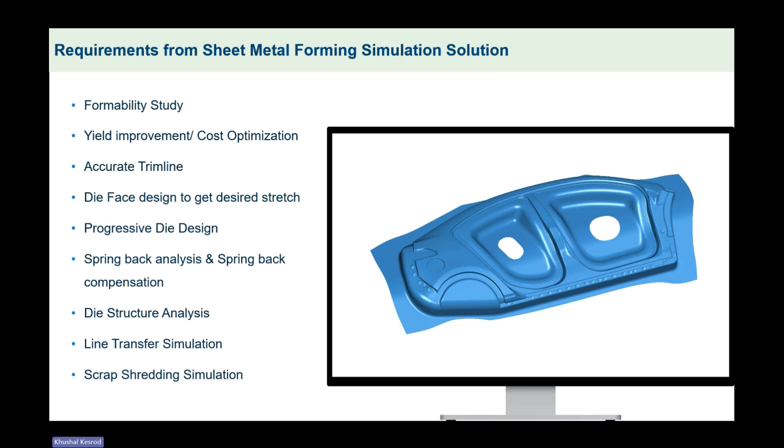So that is where die structure analysis comes in, line transfer simulation, scrap shredding. Some of these topics I have kept for future reference, because in one go we'll not be in a position to cover all of them.

So we have different modules in Dynaform. One is blank size engineering, under which you are able to simply do unfolding. But unlike what you do in CAD, which basically unfolds just the same area as your part, here the stretching and all those factors are also considered even at this particular stage.

So unfold sheet metal geometry, quick formability, you can use it for nesting, whether it's multiple outline or a single outline, multiple part and single part, or even assembly level nesting also can be done, and you can as well do cost estimation. Pretty much quick in doing that.

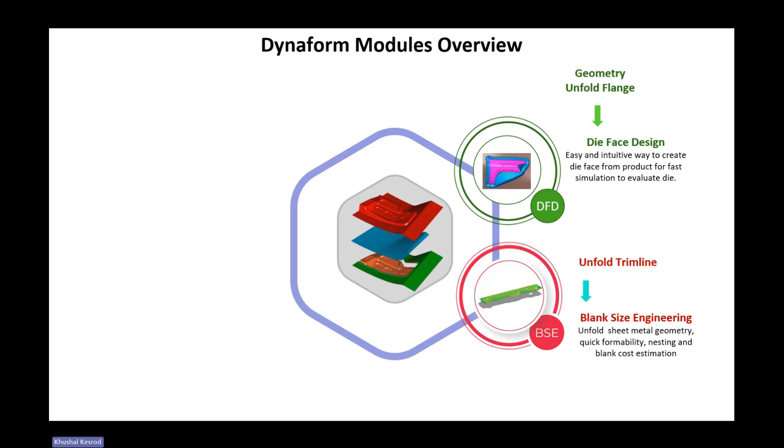Then comes die face design. After you have your part, you should be in a position to properly define the addendum before you reach the die face, and your die face should also help you bring a properly formed component. In addition, you will be in a position to define beads in the die face design area so that you get appropriate stretch.

Formability simulation, where deep drawing, line die, progressive die, spring back and spring back compensation, draw bead optimization, all these you will be in a position to do at this stage. That is what formability simulation is.

While it uses our own internal solver called SIGFORM, it can as well use LSDyna as an external solver. So Dynaform, being a very nice user friendly pre and post processing environment, makes use of both solvers, SIGFORM and LSDyna.

Blank trimline development is another module in which you can optimize your trimline with multiple iterations, so that you don't have to rework your model after final draw.

And there is a module for tube bending and forming. It's a hexa corner, one of the corners was very important, which is DSI, die structure integrity, which is not shown here. Tube bending and forming again uses LSDyna as a solver, only LSDyna as a solver, I would say.

With this, we can actually touch on a basic and very important module called blank size engineering. As I said earlier, it helps you unfold the geometry, do an early check of formability, and material cost estimation by carrying out a nesting operation.

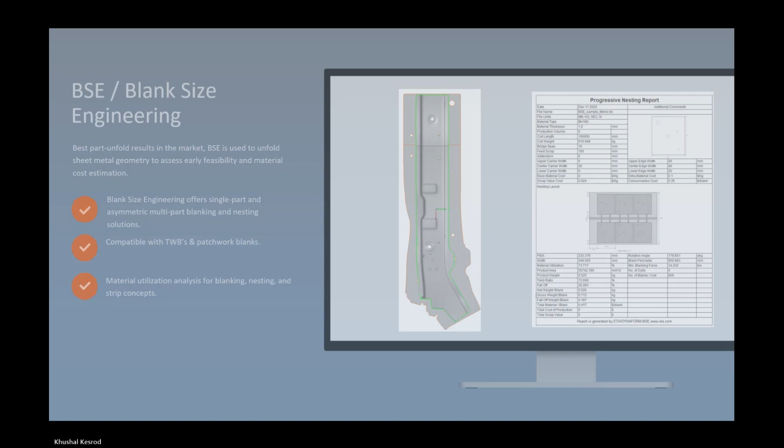So I'll directly take you to the software and show you an example so that you understand it better. When we open Dynaform, this is how it looks like. It's pretty simple. The project that we basically see is to manage complete data in a single directory. Then you have processes like BSE, DFD, FS. You can import the geometry.

Let me just create a new project quickly. DF 9000, some numbers. You can mention a directory in which everything will fall, in the single directory under the same name of the project we have given. And there are different applications that Dynaform basically does. So we are selecting blank size engineering and going ahead.

Under blank size engineering, you are able to do outline formabilities, nesting multiple outlines, unfold, assembly, and so on. But we're going ahead with a few basic things. Here, some of the icons which are not used at this stage are automatically disabled so the user doesn't get confused.

Geometry is something we need to import to start with. Then we have all the views - how do you want to see geometry, shaded or wireframe, meshing shaded or wireframe, and standard views like top view, front view, rotate, all sorts of things. Then some common utilities like angle measurement, length measurement, and finally the result, which is currently disabled.

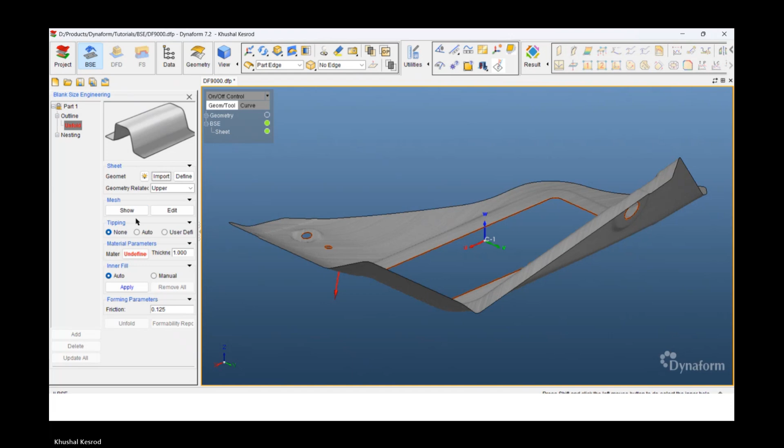Here, when it is doing unfolding, it anyway needs mesh, so please keep this in mind - it's unlike CAD tools. So you can refine meshing if you want at this stage. Tipping automatically takes place if you choose auto. Forming needs really appropriate tipping, but here it's okay even if you're not mentioning that.

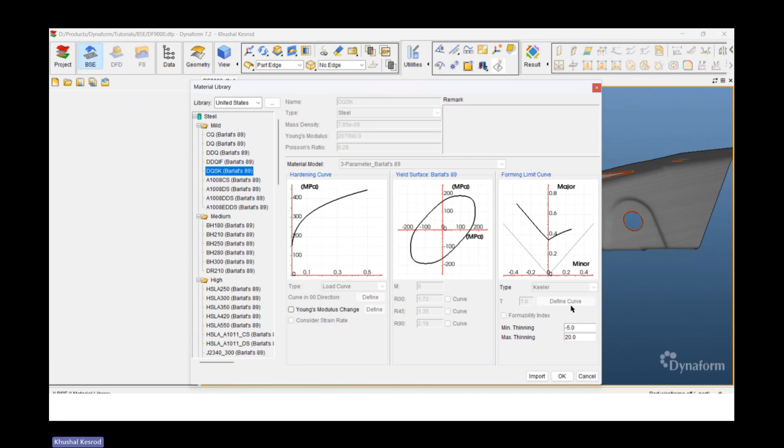Then there is a material library which you can access. If I click on material library, you have US material, Europe standard material, China, Japan, and you can define user defined material library as well. I'm selecting one of these, which provides hardening curve, yield surface - how within the surface the sheet gets stretched - and finally the forming limit curve. Okay, I've chosen that, and I can say unfold.

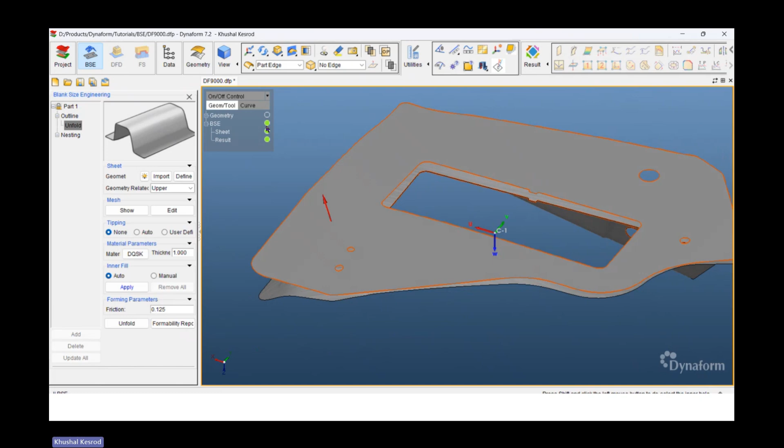You can see the unfolded component and a final component also. I'll switch off the final one so that you are able to see only the unfolded one. At this stage, I will also be able to see the formability report.

Let me quickly show you the different options you will see under formability. You can see thickness variation, thinning in percentage, minimum major principal strain, FLD, and so on. You can choose what format you want and apply so that you get a quick report.

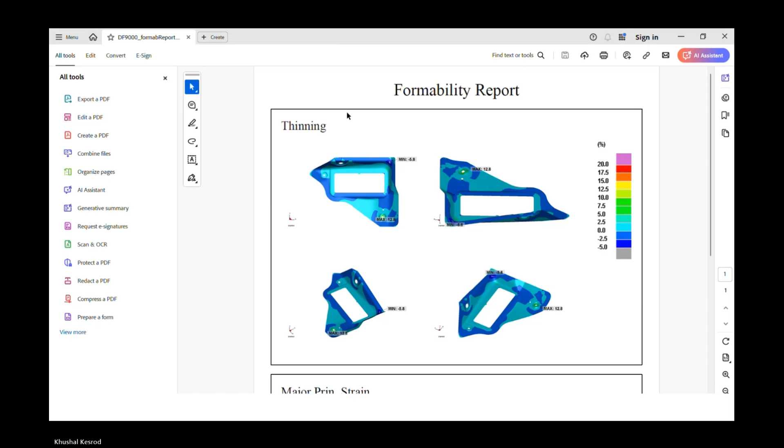So for formability, you can see how percentage thinning is shown here in a different orientation. Most likely it remains in the range of below 5% only. You can also see major principal strain and so on. We have only chosen two parts - otherwise it would have been a little more detailed report.

Let me show you next, which is nesting - most important. So for whatever blank we see here, if it has to be taken out of the coil, you can create the nesting that you want. There are different types of orientation available in series. Parameters for coil can also be mentioned, like what is the width.

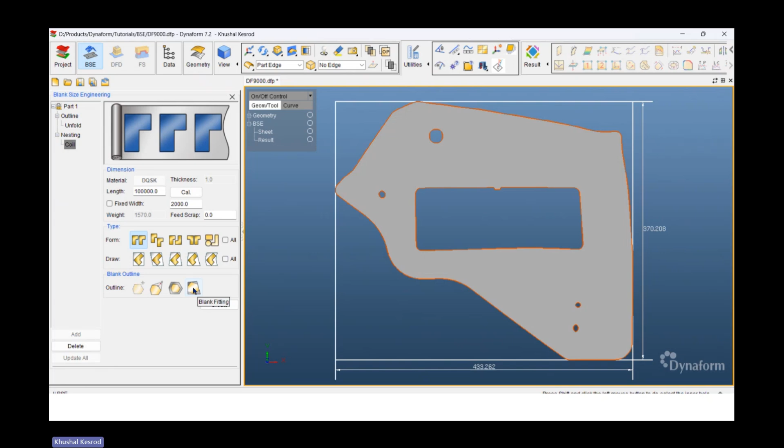You can do it in pairing, you can do it in mirror, even based on draw you will be able to take the size. And for blank fitting, you have different options - automatically it chooses a particular orientation. You can see what the area utilization is in terms of weight - complete detail it shows you.

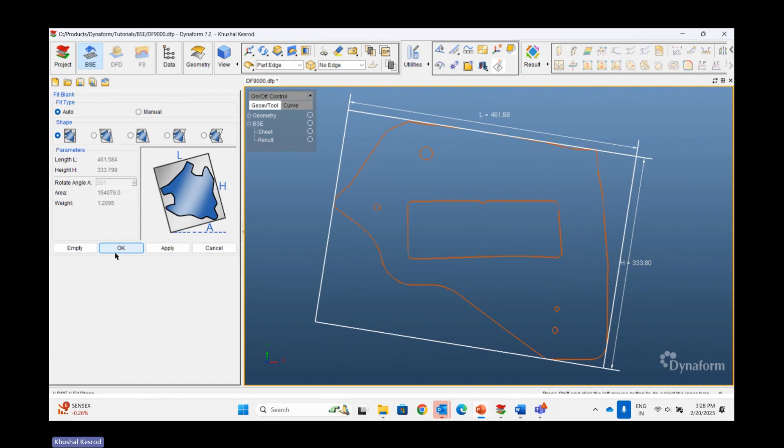But in case you want to make any changes manually, you will be able to change its rotation orientation. It shows you real-time weight change and area change. So automatic fitting pretty much gives optimum results. You can say that fitting is okay for me, and let's create the nesting.

Even before creating, between both the blanks you can set what distances you want to keep - bridge span - and if I'm cutting with a laser cut, 2 mm is more than sufficient so I'm able to utilize better material. It shows the highest utilization is 55.304 with multiple iterations. You can choose which iteration to go ahead with, and see each iteration by clicking on it to see how the orientations happen.

Now, on top of that, there are some functionalities at the bottom - you can further click and adjust things manually within this particular iteration, such as rotations and translation. It could be too much, but you will be able to make some changes here as well.

Okay, so I don't want to make any changes manually - I simply want to cancel that and generate the report.

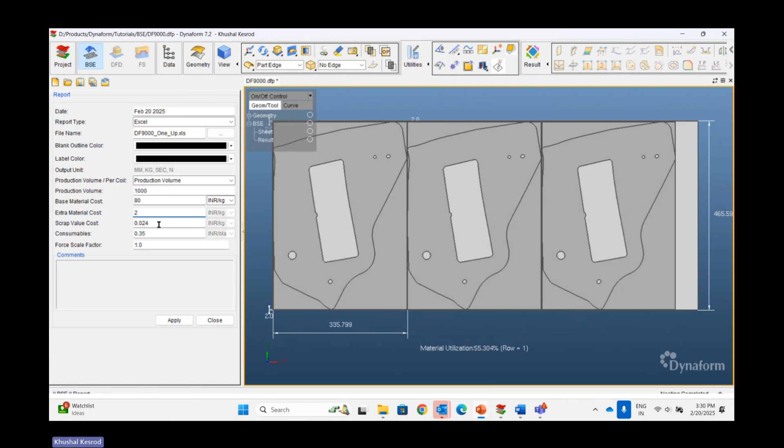Now when we click on report, you choose what type of report you want, whether it's Excel or something, and then you mention production volume. Here the rate INR per kg, let me mention - I'm not sure if it's correct, but 80 rupees is what I'm mentioning. Material handling cost is 2 rupees per kg, and consumable is 1 rupee. I'm just applying that.

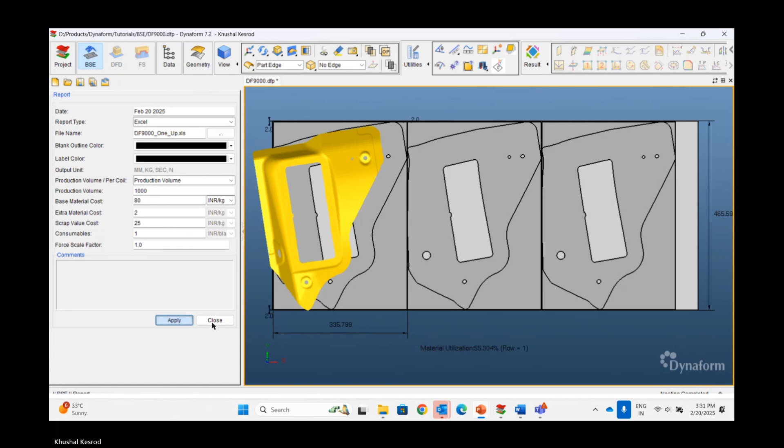Okay, so it is generating a report in Excel format, which is what we have chosen. It will show me what cost it will take to make 1,000 components, because we are giving production volume as 1,000. Coil length was anyway considered earlier.

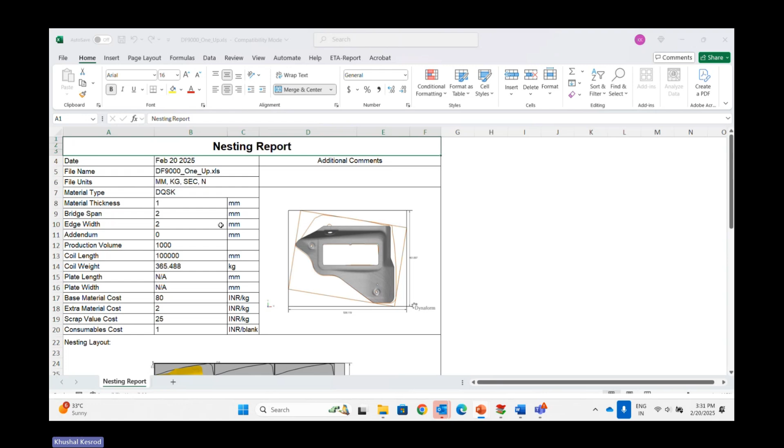It provides me the date on which the report is generated, what was the file name, units that were used, material type that was chosen, thickness of the material, bridge gap, and all those. It gives me all the inputs first.

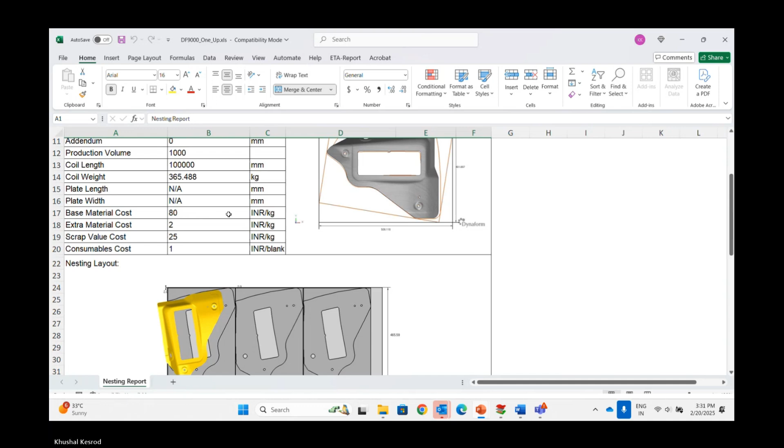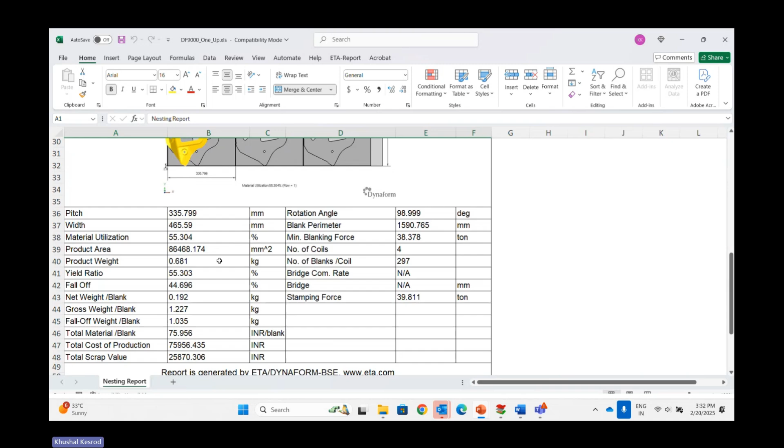After the nesting layout below, you see these are the cost inputs we have given, and below you see what is the pitch distance between both the blanks, the total width required, the percentage material utilization, product area, and even what scrap volume you're going to get - value, not only volume, because we've already given rate for the scrap as 25 rupees. So total scrap value is this much. Nice detailed report given. So let us come back again.

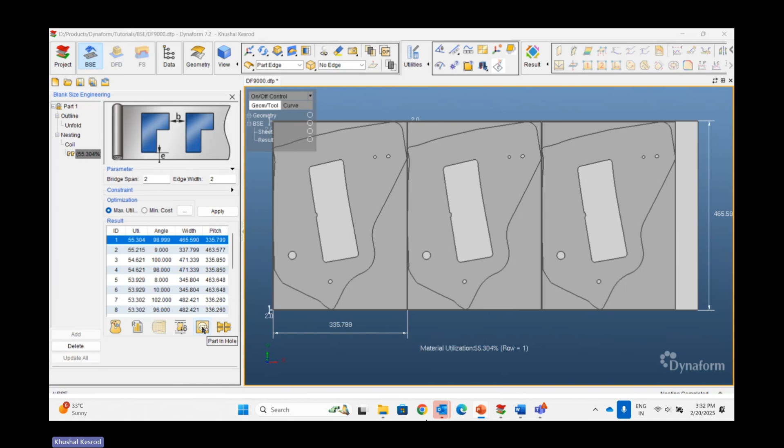Now this particular opening, if it is large enough, we are able to accommodate some small component in it. So a small component's blank can also be taken into it - there's something called part in the hole. So that cutout is otherwise going to waste. So before we do that cutout, I want to basically take out some small blank out of that.

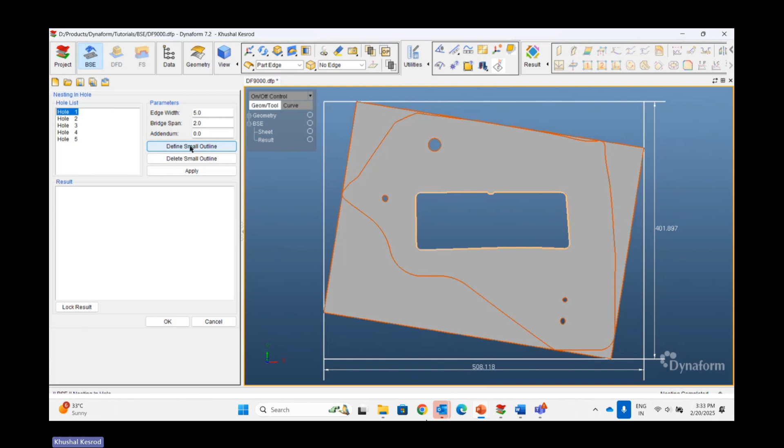Okay, so define a small outline - you can define it here, or you can import that. All these are the small and big holes. But these bigger holes are where I want to utilize by putting some small blank. So I'm simply creating it manually, not importing any geometry.

I'm just creating that rectangular - you can create, let's say, two different rectangles, small, so that you're able to take, or maybe a single large one. I'm just, for example, defining one small rectangle and say okay, apply, okay. Now in the nesting, you are able to see some small blanks are actually taken out.

You can see the dark borders inside, and now the utilization it shows is 60%. Before it was showing 55%, right?

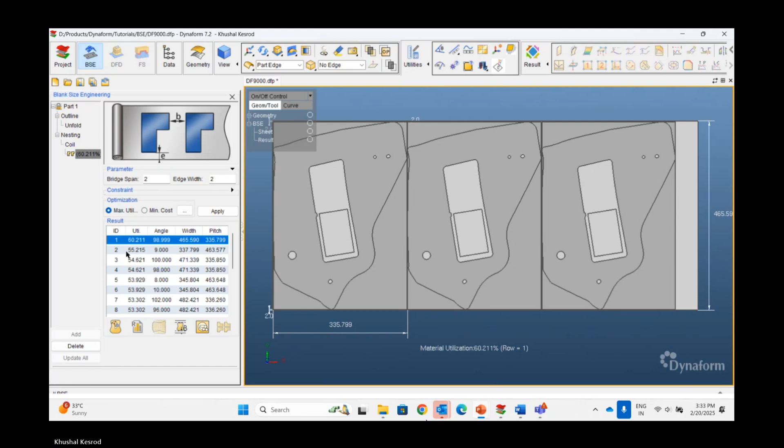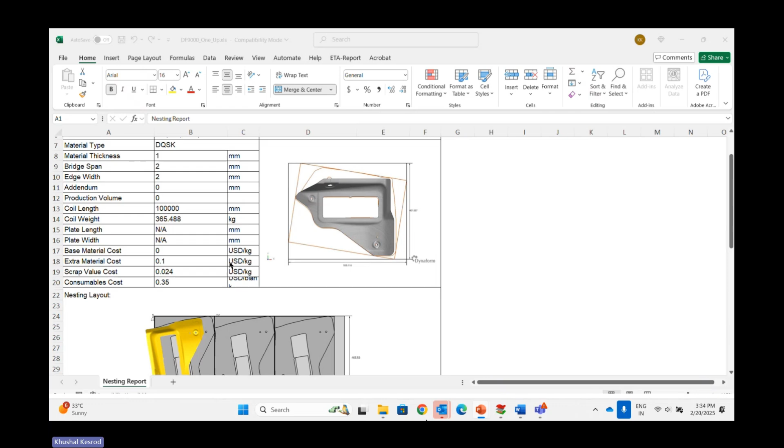And if you extract the report, obviously most of the things will remain the same. We're not making any changes here in terms of USD and all those, because of time constraints. So it's simply going to continue and taking that. So here we will only focus on what is the percentage utilization improved - from 55 to 60% is what it is showing us.

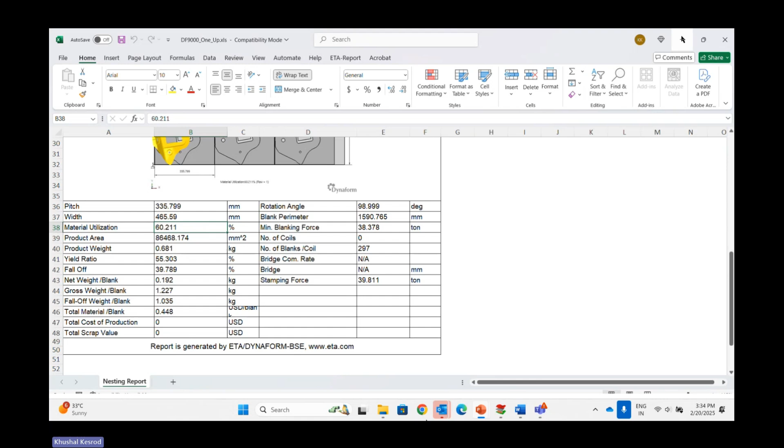Okay, so let me take you to a little more advanced example. Within the BSE, instead of importing the simple one, we're going into part and seeing the advanced option. Under advanced options, we have something called tailor welded blank. So blank - in fact the name itself shows there could be two different materials. There could be change in thickness, change in material, and so on. It's basically a tailor welded blank.

Okay, so we're going to choose - let me select the surfaces which are falling in blank one, including that, and under blank two, I want to select the remaining surfaces. All right, so let me select. There are many good selection methods here.

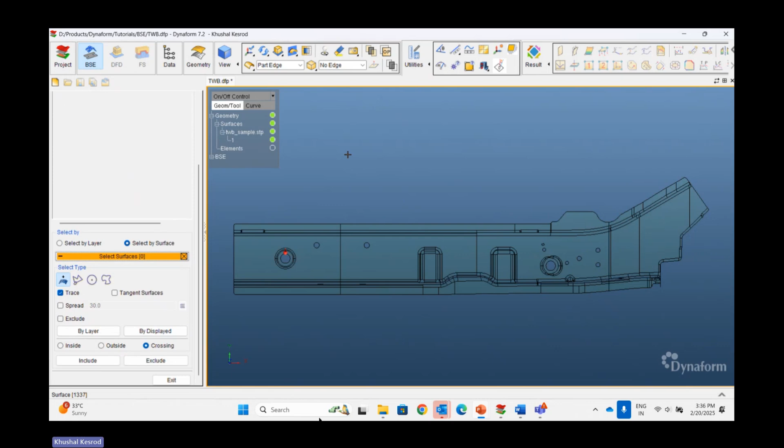It's very user friendly. Eventually one can learn to handle it in a better way. So yeah, both the blanks you can actually define.

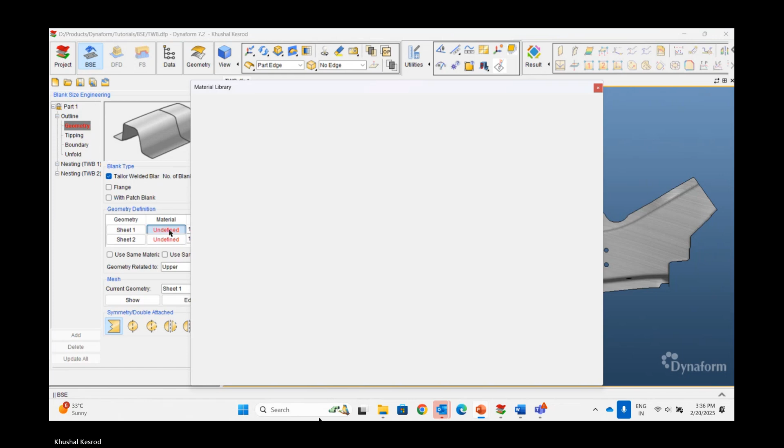Let me define different thicknesses - 1.2, sorry, it's 1.2, then 1.3. Let me choose material, and another material here maybe. So there may be different material, different thickness, or same material with different thickness, or something like that.

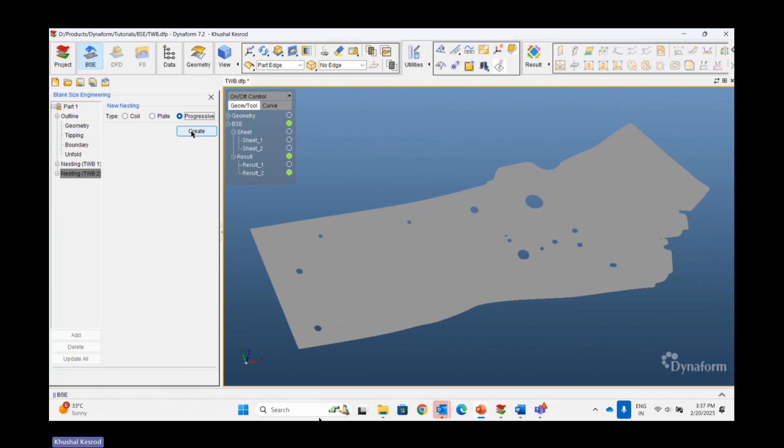Okay, so now you can see under nesting, you can - anyway we can do unfolding first - but under nesting you see tailor weld blank one, blank two. So there are two blanks. This is the first blank and second blank. So let's do a nesting under progressive for the second one only, which is a little more complex compared to the first one. So this is how it will basically show you.

And let me just select another option, mirror nesting. This time the rest - blank outline and all those - will keep the same.

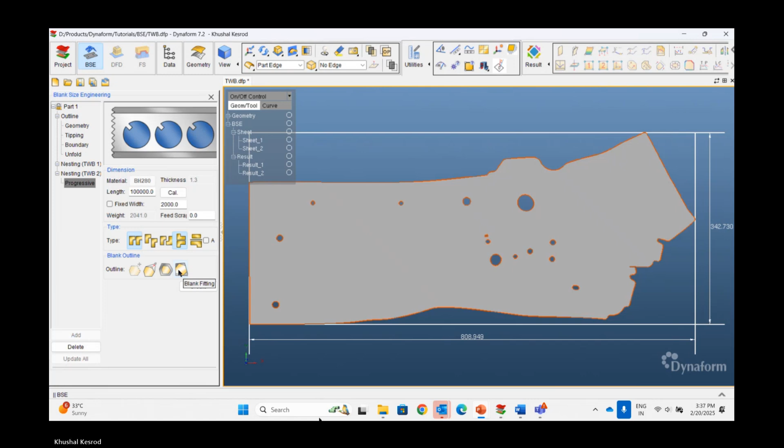Yeah, I'm just keeping it as it is. Then carrier distribution, I want to keep that as a center. And when I'm selecting that, you can see in above figure B, D, E, all those I am actually making 10 mm only. Sorry, B I think is between two. Let me just increase that so that there is a sufficient gap between mirror blanks that we use.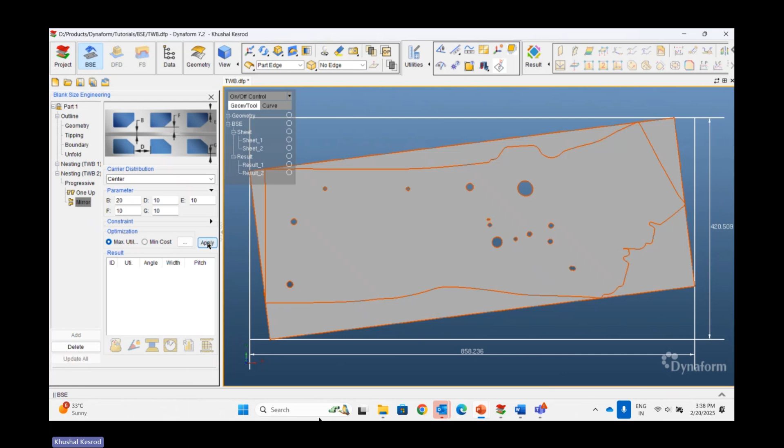And optimization can be done based on maximum utilization or minimum cost. Ultimately, both the same. Here, it could be little different also because it is tailor made, having different material, different thicknesses. So you can mention those cost of the coils and all those. I'm just saying apply. You are able to see the utilization here, 68 point some percentage in the topmost.

Again, same thing. We have already seen manual translation or orientation change. Yeah, I think I can skip this. We have already seen that.

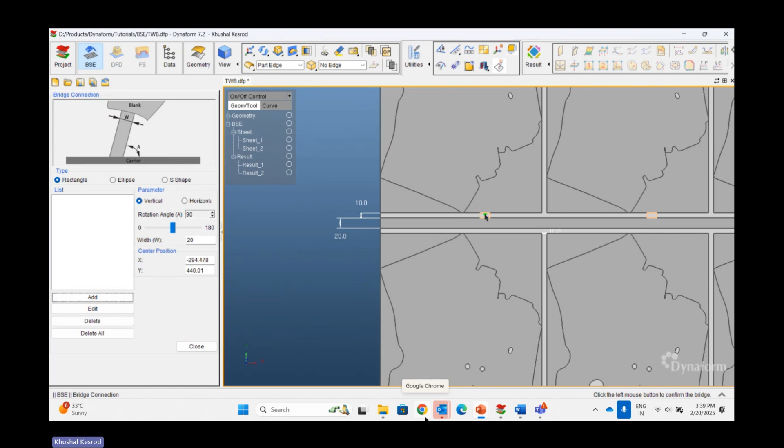And then bridging. When we are actually having mirror type of blanks, if you basically want to carry them together in progressive, you can connect them. That is what is called bridging. So rectangular type of bridging, I want to place somewhere between this, and only one side you are creating bridge, automatically second side it is taking because you have already used mirror.

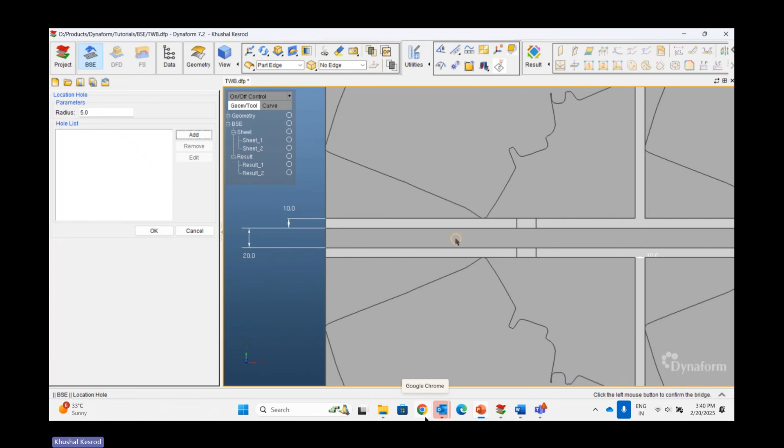Again, there is another functionality, to insert the hole somewhere, so that for positioning, you may probably use this location hole. So I'm just mentioning 5 radius hole to be placed in this area. This area anyways is going to go in scrap, but in progressive die you will be in a position to place your blanks properly. Okay.

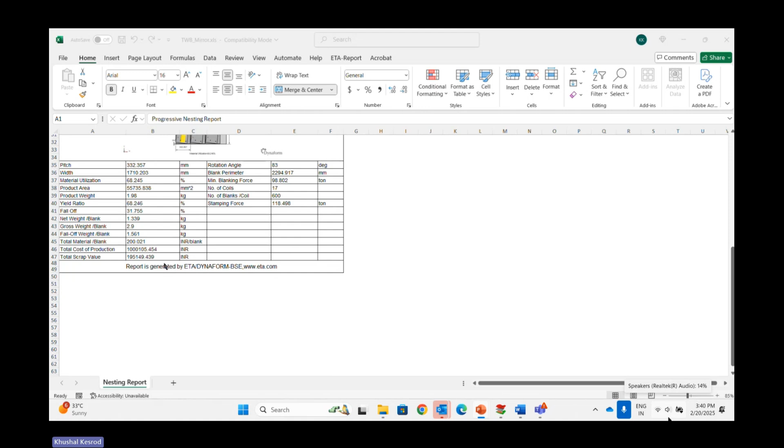So this is how detailed, all functionality it has, and then you can generate report. Obviously before generating the report, you can mention what are the rates, so that it gives you complete estimation. Here it shows you all inputs that you have given, what was the production volume, what is the rate that you have given, and finally, related to blank.

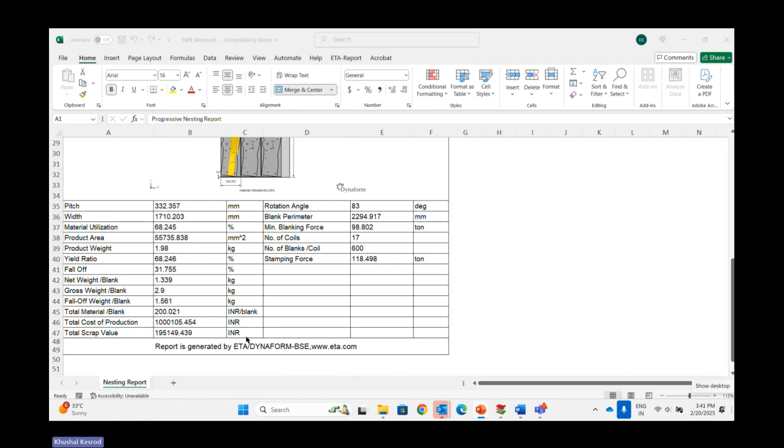So, the single blank is basically costing you 200 rupees, and total cost of production is around 10 lakh. Scrap is around 1,95,000. So that's how it is. Okay, so in fact, one more option here we have is assembly nesting. So you can have 10 or 20 sheet metal components in a single assembly, and it can actually help you estimating cost for all the components.

Another module that we're going to see is die face design. This is mainly conventionally done in software, but as I said, it is basically done by experience of the designer and intuition. But advantage of creating addendum and die face here is you will be in a position to check them quickly over here itself. You can as well add beads, their parameters quickly, and even the capacity and all this.

Okay. So quick and easy die face design enables more accurate, more robust estimation process, and it increases process reliability, efficiency, and cost reduction. So die face preparation is one of the things this module is used for. Binder creation, beyond the die face, the flatter areas, and addendum creation. Addendum is basically between binder and a part.

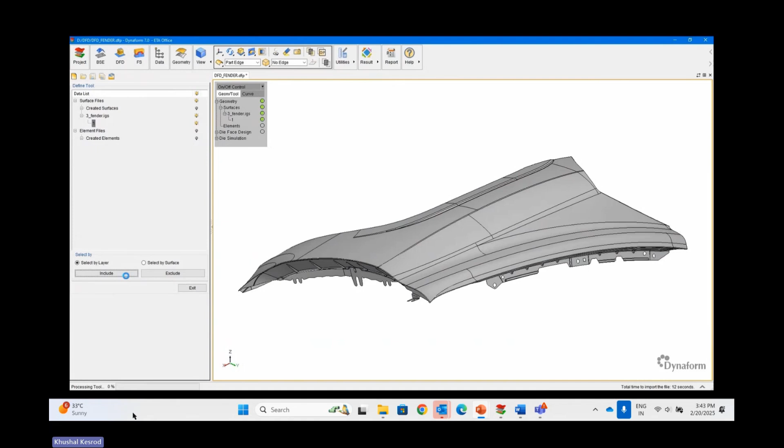DFD is the name of the project we'll create. Fender is the part for which we are basically going to define die face. So this is the part for which we are going to design die face. And here there are going to be two operations.

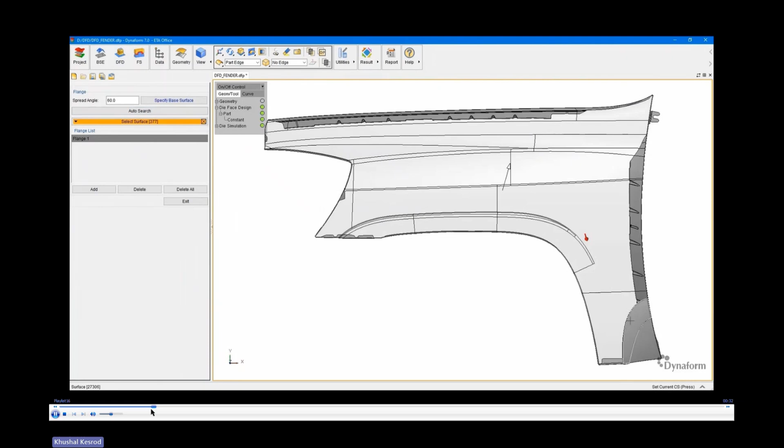There'll be flanging also. So firstly, we have to define the material that it uses, and then here it's a flanging. So you're just choosing surfaces which are pretty much flat, and then adjacent to that, it automatically selects the flange area, and you can see how it can differentiate that.

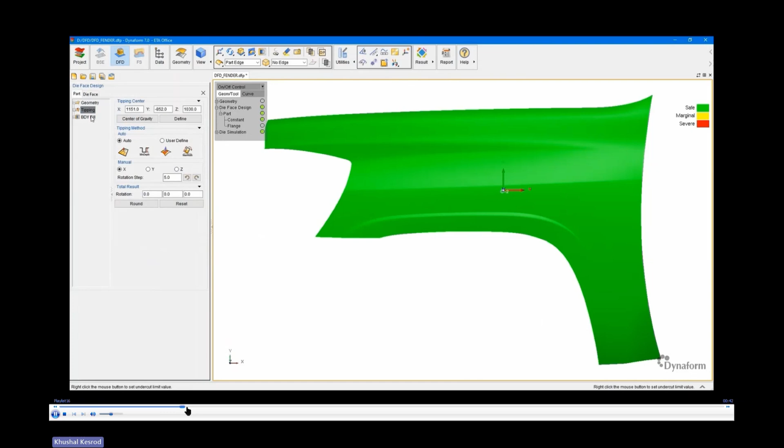Smart enough to understand. Then tipping obviously makes a difference to how its addendum and orientation is going to come, but we can directly go to body fill. There is an automatic way of filling it so that major areas where undercuts are can be filled.

It automatically extracts the boundary around, and it uses curves based on the options that you give. 300 is the radius that you have given. But some places, if it is not acceptable, you can even do it manually by right clicking that. And I'm just creating a manual curve in this zone particularly.

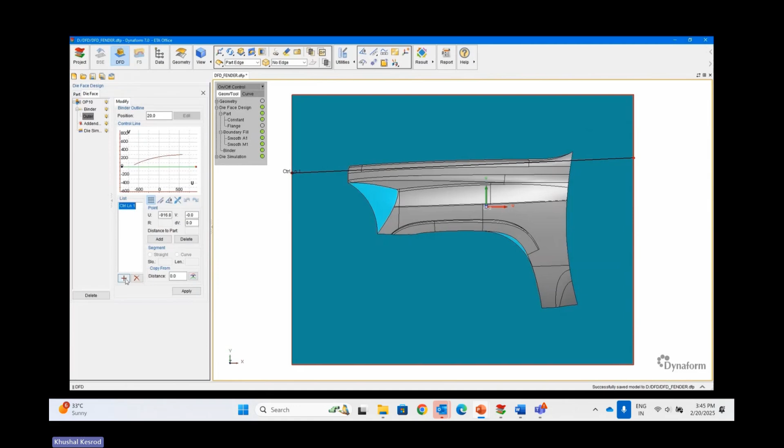Yeah, and this is the binder area, just taken larger than it requires, and these are all control curves that we need to define along and across the length and breadth of the component. This is just to ensure that we're giving different control to different segments. So our ultimate aim is to smoothly define, above the tipping plane and below the tipping plane zone, how the curves should be.

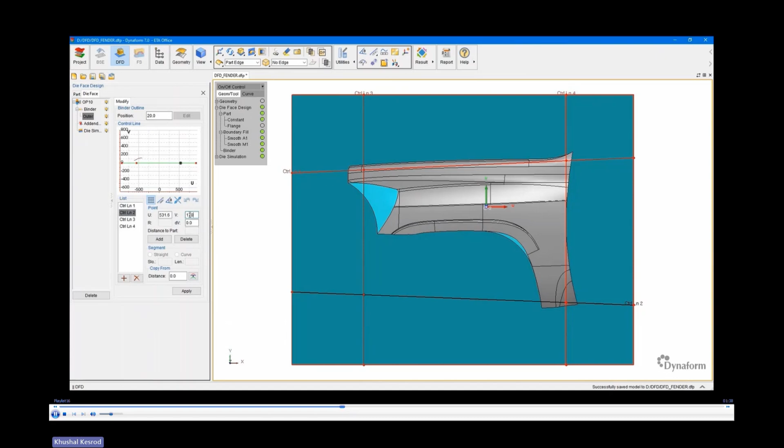So we are actually trying to make curves very smooth, and you can see there are curves 1, 2, 3, 4 that we have actually defined, and we are simply tweaking their roundness and transition, I would say. So that is most important. So once that is defined, you're able to mention its actual location where it has to be, so that it makes it smooth. And once it is done, you can accept that.

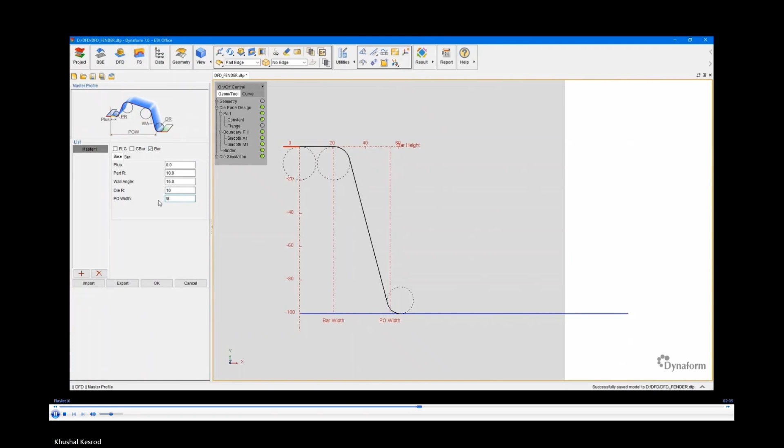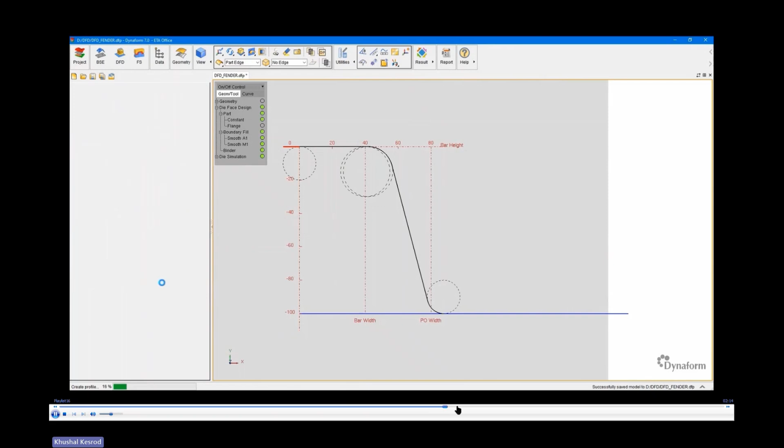Now, this is addendum design, where you are actually giving different dimensions so that material flows properly, right? So you are essentially defining the bar and the radius of the bar and so on at different locations. So once these parameters are defined, you can see this is how the addendum is created.

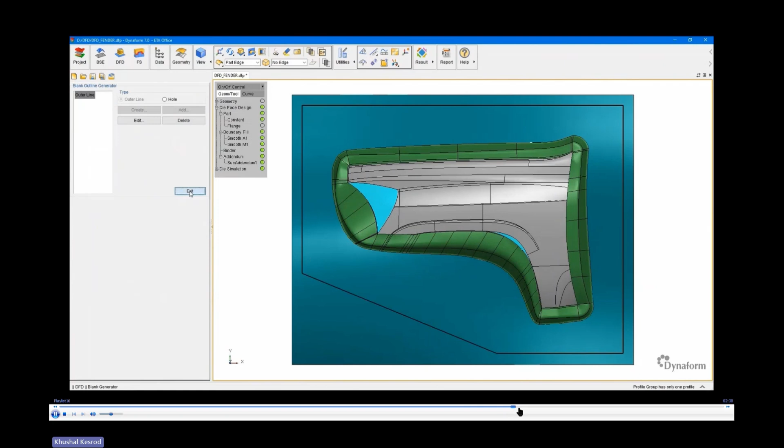Now, binder area, I want to make it limited. It's not necessary that it should have all the complete outside region. That much area is not needed. So we're just defining that this is going to be kind of nearby blank to us. After trimming, you will be able to define the optimum blank size. Yeah. So you are able to animate and see how forming is going to take place. Ultimate aim is to see whether I'm getting a proper output.

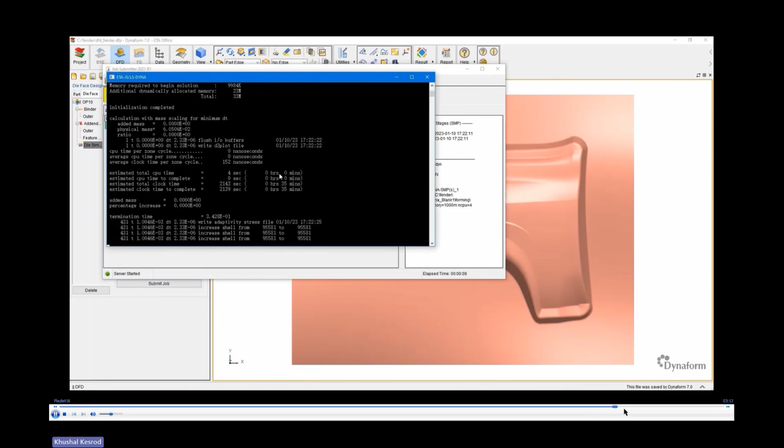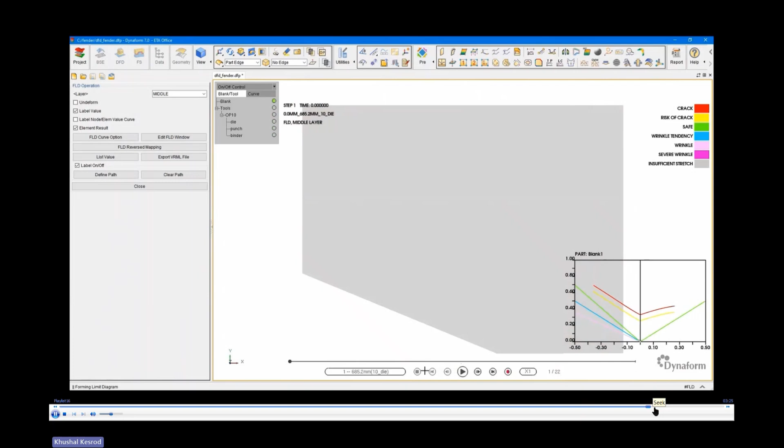Whenever you submit the problem, this is the window that will appear, the job submission window, where your jobs can be in queue, in progress. You will be able to see that, and once it is completed, you can right click and see the results. And when we come back to Dynaform again to see results, it depends on what you have requested for.

This first one is basically FLD. And FLD provides you a lot of insights in terms of whether there is insufficient stretch in the component. So insufficient stretch is there in the component. There are severe wrinkles, but anyway, they are appearing outside of the component, and there are safe areas here, and there are some wrinkle tendencies on the component itself. So our aim is that at least the component area should be properly stretched and safe, so that it will not have cracks or even wrinkles. That's our aim.

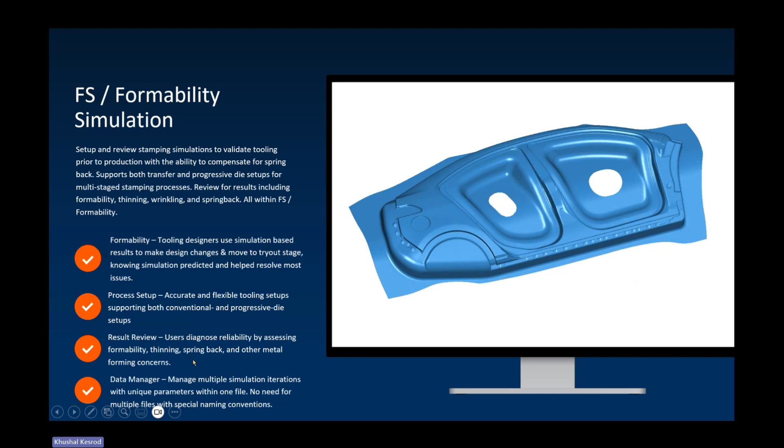So now what could be the changes that the tool designer would want to make? He may introduce beads in these binder areas, so that the material flow properly happens, right? So that is what comes next. Formability simulation, under which you will be able to see how best my formability is happening. Again, stretch, wrinkles, and all those you'll be able to see, review the results, diagnose them. What thinning is coming? What is the springback? How can you compensate and all those? So this is another very important module.

What we have now is a forming simulation project, and we're going to use sheet forming as an option here. You can choose the different folders so that all the results related to forming go there, and sheet forming is the option that we have chosen. Here, the moment you select forming, you have crash forming, single action with pad, double action, all these operations. You can simply drop them down.

This is basically trimming, flanging. So let me take trimming first and then flanging. However, in case you take a different sequence, you will be able to change the sequence of operation from here by pulling down something that you want to change. So this is my sequence of operation that I have chosen. This is just the outline that you have defined. The content is not there yet. So operation 10, operation 20, operation 30. Okay.

Now we can import the geometry that is required. One beautiful thing here is, whether you have geometry in STEP format, IGS format, or a different combination of formats in the folder, you will be able to simply import all of them together. All right. And once it is done, because they are in different layers, you can see curves fall in a different place, surfaces are in a different place, and so on.

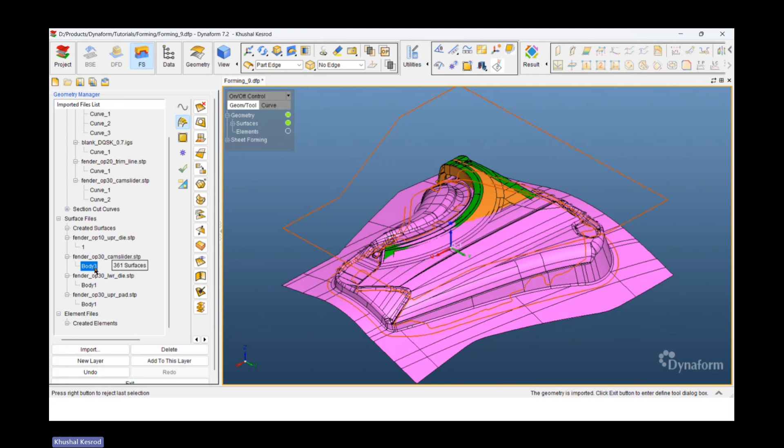Okay, you can start defining things one by one in the model. So this is just the geometry environment we are in, so you are able to see everything. But once we exit this location and go back to operations, you don't see anything here, because once we select those geometries in this environment, they get converted into mesh. So I want to define the outline of the blank. So define outline. You can simply add it. You could as well create it, but we already have it. So just selecting it from the screen and say okay, done.

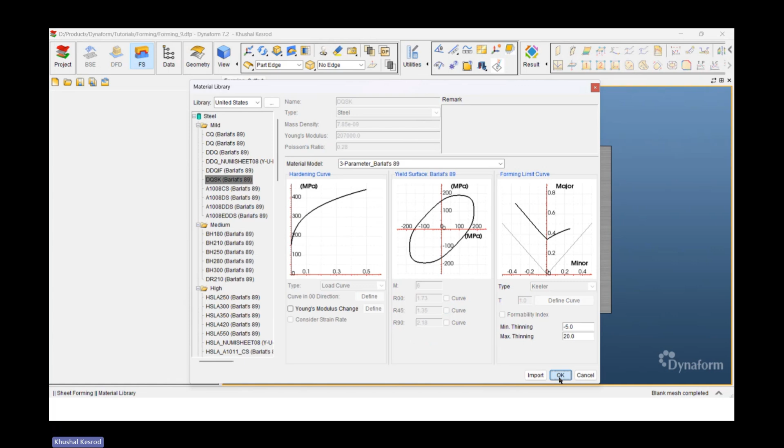And there is something which remains undefined. That's the reason blank is basically material selection. And once it is done, it automatically turns black. So in short, all basic things are defined, and you can go to the next location.

So operation 10, any global parameters that you want to play with, like maximum size of the mesh, minimum size of the elements, and so on, you will be able to change them. Anyways, let's go to the die, define it. And because the die model is already there along with the die face, I can simply select it from the layer itself. I don't have to even select by window. I'll simply go ahead and select it and include that.

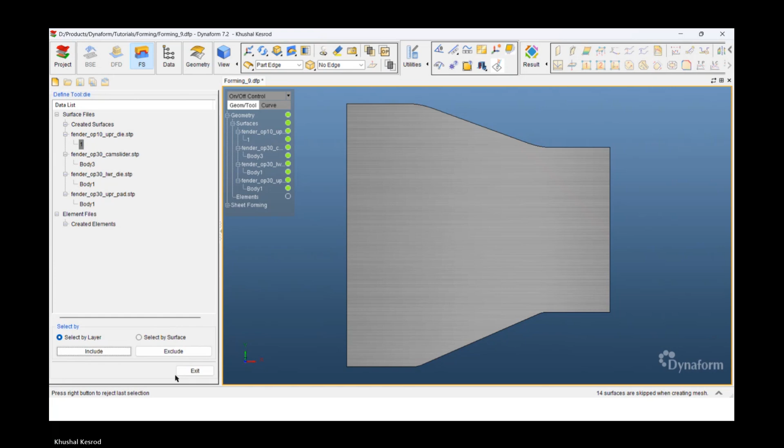Die got defined. When I come back, you are able to see blank and die now because two things are already defined. I'm just rotating and showing it to you. Now I can go next and select punch, define that. Now, barring the die face, the punch is all the complete middle area. So there are selective things. That's the reason I'm going ahead and selecting by surface. I'll just select it by window.

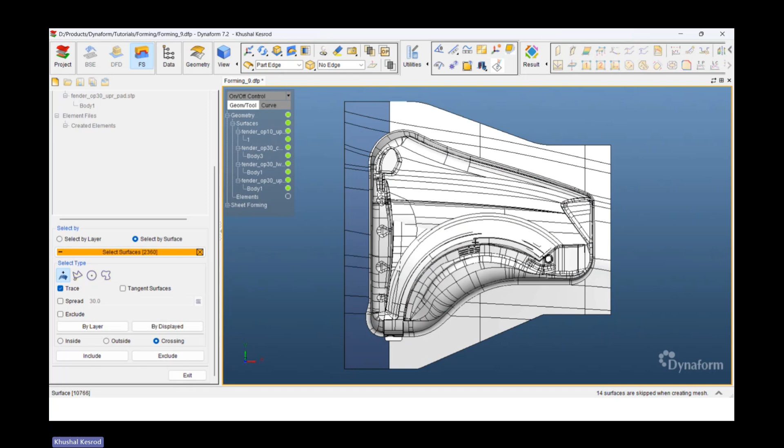This may be a wrong selection because it is showing even other surfaces got selected, and I'm deselecting it again. There are multiple ways to select them very efficiently, but for now I'm just going ahead with this option that I generally use. This is also not required. All right, this also comes in the flat area only. Okay, so this is my punch area. Because it converts from geometry to mesh model, it takes some time when we come back from geometry to this. And if you rotate and see, you have a punch, blank, and die.

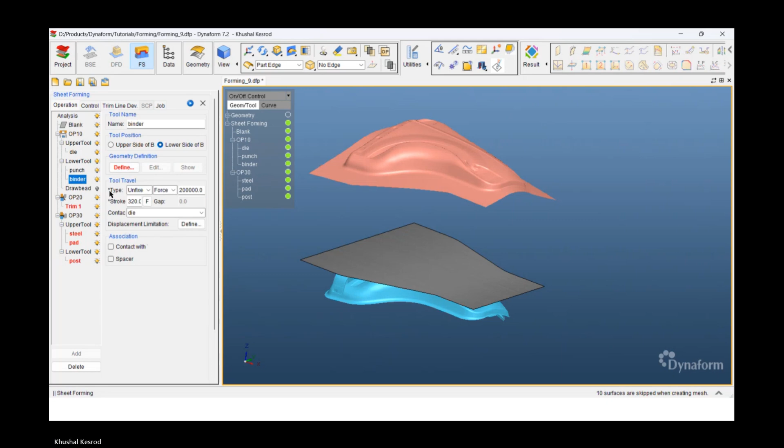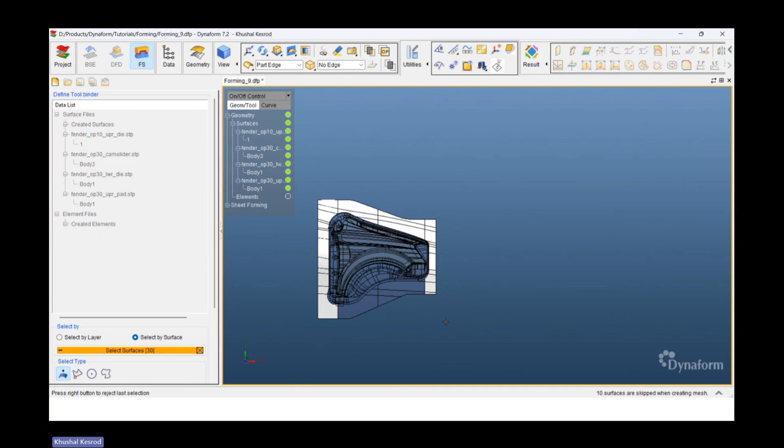Now, needless to say, the binder is basically just a flat surface of the die face, right? So I can just quickly go and define it. Same orientation again, top, and I'm just selecting the outer flat surfaces. Wherever this window touches it, basically is that. That's the reason I'm selecting an area which can help me touch more surfaces. All right. So this is my binder. So for operation 10, whatever is needed, if you look at the tree, everything turned black. So everything is selected for operation 10.

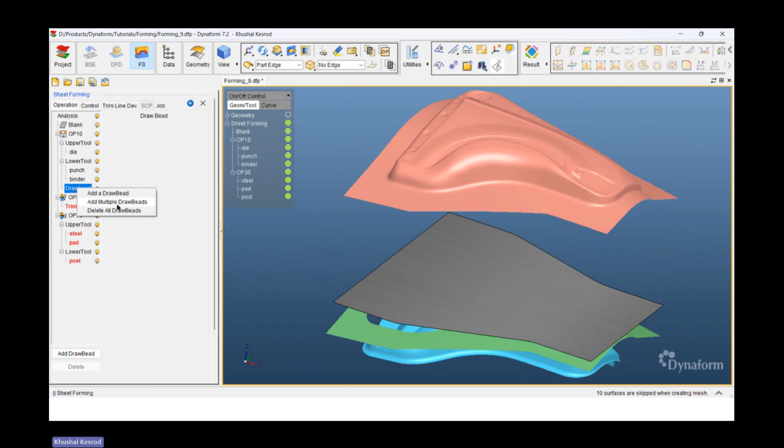But since it's a progressive, operation 20 and 30 are placed somewhere else. You can define the stroke that you want. You can increase or decrease it from here so that you can optimize the solving time. Now, within this, if you want just a 1D draw bead, I mean, you have not created that draw bead in the die face, you can actually do it over here itself, so that you don't have to modify the geometry. This is really good. So I'm just importing these curves.

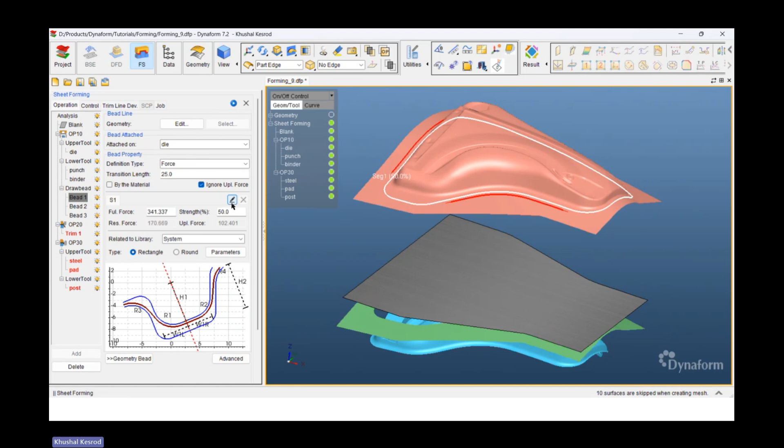Though it looks like only lines, when you get into the shape of the draw beads, you are able to see whether it's a rectangular type or round type of bead, having different parameters, R1, R2, R3. So though it's a single curve, you can actually segmentize it. These are all the parameters that are there, R1, R2, R3. So this particular segment, I can further divide the way I want in a particular area, because you don't need the same material flow at all locations. So I'm defining this particular segment as one segment, in short, breaking it into segments, and you can define different strengths in different segments.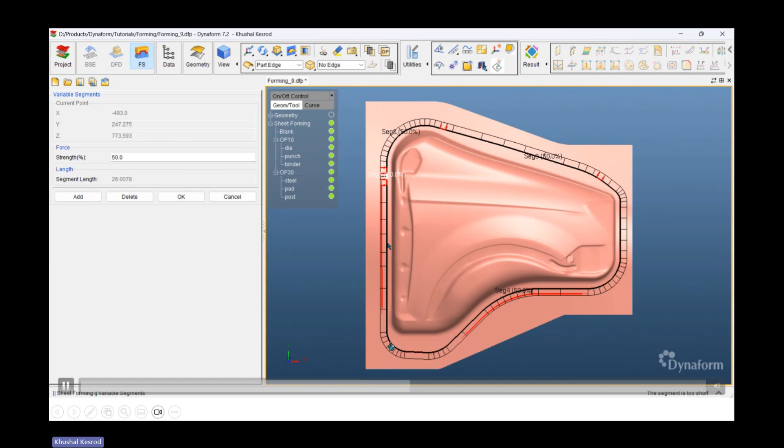So, in fact, your flat area looks very simple, because all the beads that you're defining are in 1D form only. So all segments one, two, three, four, five, you're able to see. You can simply modify the strength and forces of the beads in each segment. Forming motions, you basically want to keep a stroke of 800, velocity, things like that. And I'm sorry, this is the velocity curve that you want to define. So my operation 10, including 1D beads, is already done. So I can move on to operation 20 now.

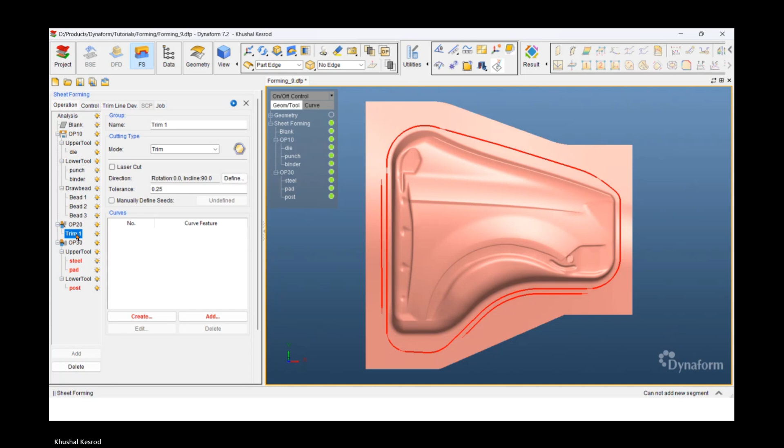But since it's a progressive, there is a shift in the X direction of, let's say, 1600 between the stations. Obviously, practically, if it is different, it shouldn't be a problem. We simply want to shift it over here so that it clears the area. That's it. And here I'm just adding trim lines which are already defined.

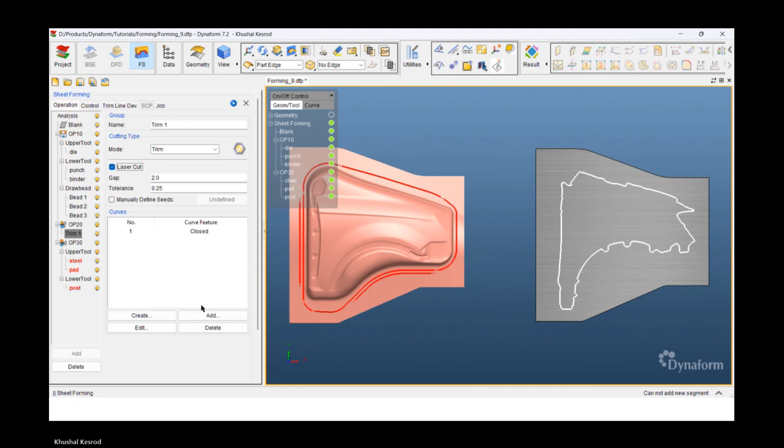Can you see this blank and trim line have basically gone 1600 mm in the X direction, to the next station. And let's say if it is laser cut, you can see the parameters, what is the minimum and tolerance that it can provide you. Likewise, we can go to operation 30. You can define 3200 so that it goes further to the next station, right?

3200. You can even change the orientation also of the next operation, depending on your requirement. And here you want to basically define padding and cam as well, because that is needed in the third operation. So you are able to add a lot of other things here, including padding.

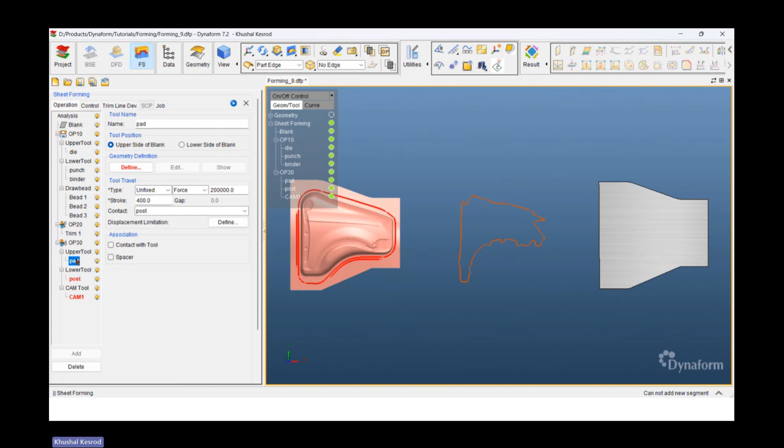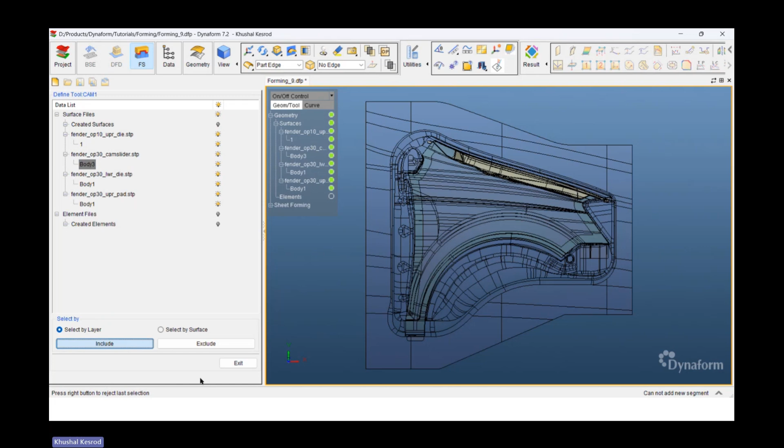So in the geometry, we already have one layer called pad. If you choose that, it should automatically shift once you include it. It should shift to the third location. And you can as well define cam. We also have cam geometry available with us. Obviously, it needs more treatment, what is the direction in which the cam is going to operate. So there is an angle.

So you can see all three operations, sorry, all three actions under this operation, padding, cam, and all those. Okay, if you go and preview, I'm sorry, I think one operation is still pending. So let me just go back.

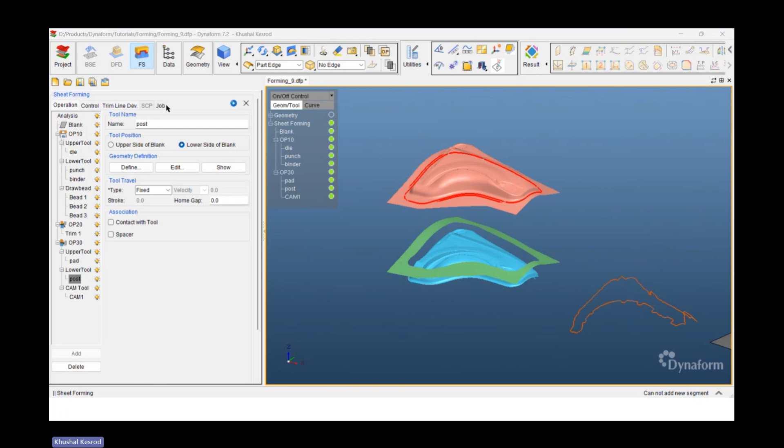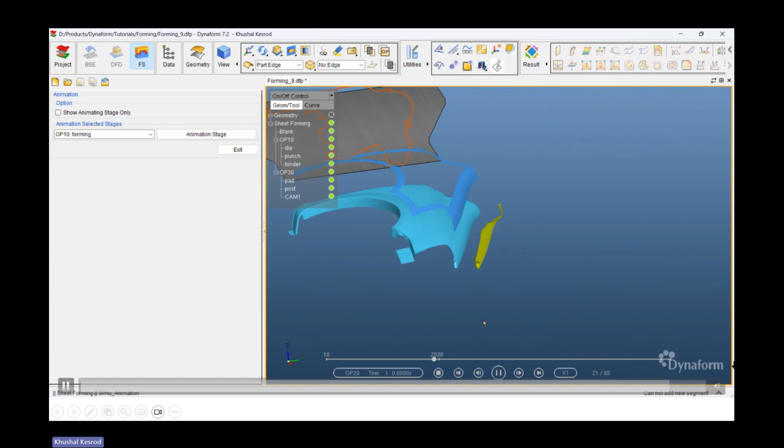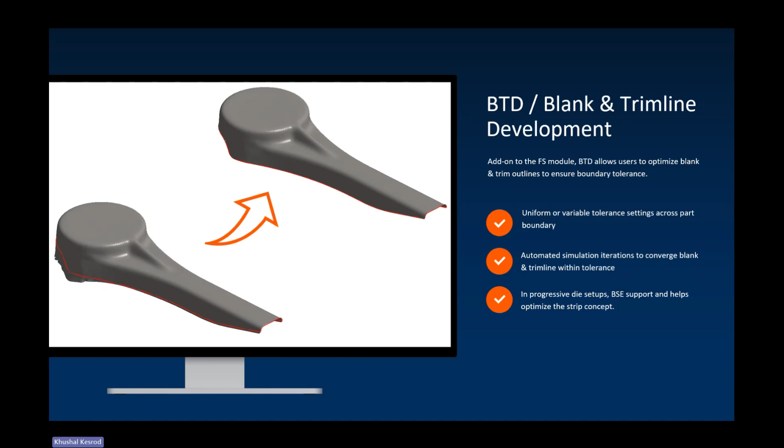Then the most important thing, the die that you have designed, whether it is going to sustain the loads that it is subjected to or not. So carrying out structural analysis of die, punch, binder by applying forces extracted from forming simulation. So you're actually extracting the forces from forming, whatever realistic forces it has. You're applying those forces automatically on the model in Dynaform, and you can submit that in LS-DYNA as a solver.

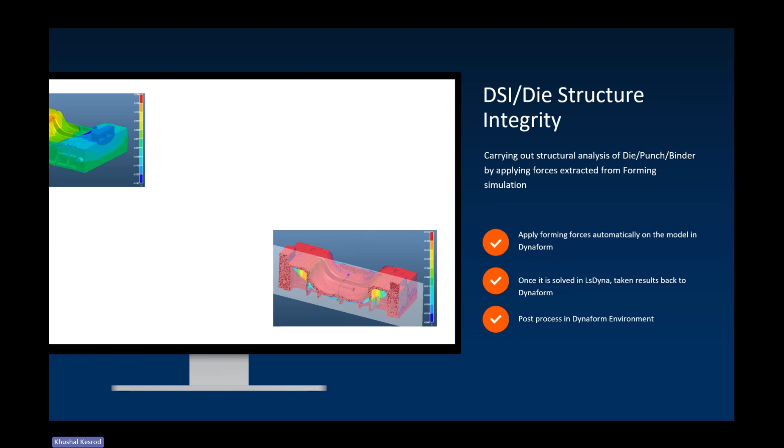Once it is solved in LS-DYNA, you can take the results back to Dynaform and post-process in the Dynaform environment and see different results. Okay, this is forming simulation results. Obviously, without forming simulation, you will not be able to directly go on die structure analysis because forming simulation provides you loads. And also, you will extract loads after you finalize the forming.

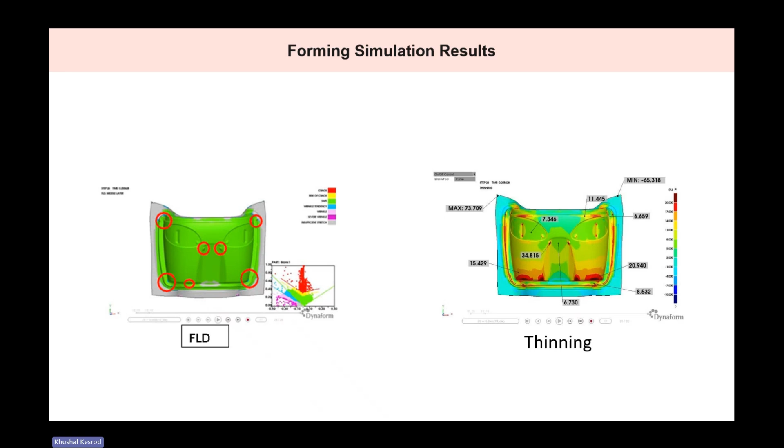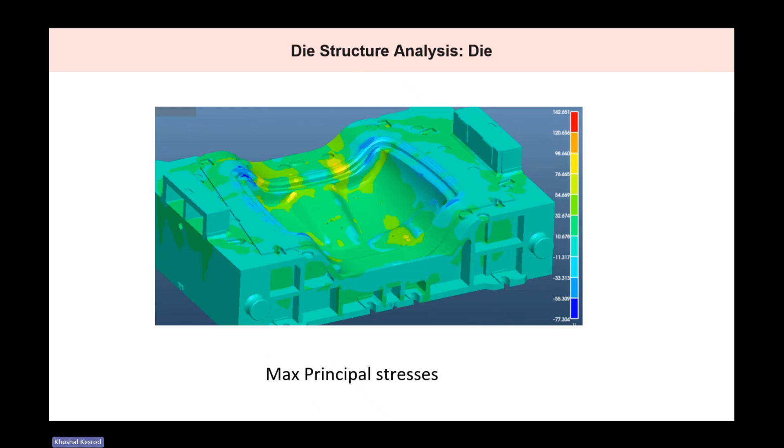The die structure is most critical because the die will have lesser space to accommodate, maybe if you want more thickness or something. So general observation is, the die will have maximum stresses and deformation as well. But obviously, if you look at it from the lower side, you will have a ribbing structure. So what that ribbing structure should be, so that it supports the complete die well for given loading conditions. So maximum principal stresses that are coming in the die, whether they are going to be acceptable or not.

Then punch, as I said, punch will have a lot of space actually to put material. So most of the time, punch will not have much criticality when it comes to structural analysis. But however, it will definitely help you save material if you are using a lot of material in the structure, by putting appropriate rib patterns and taking out material which is not required at some places.